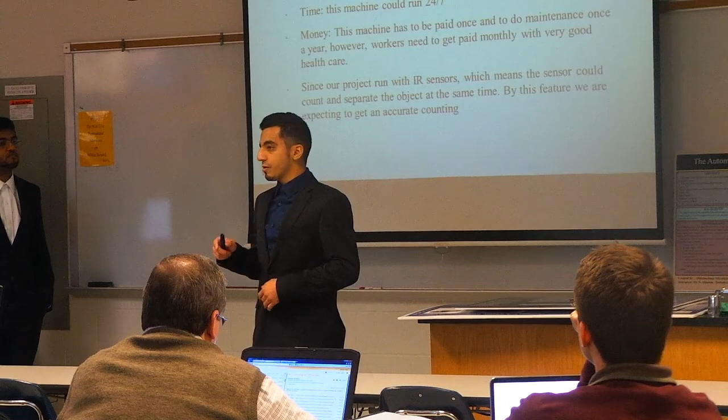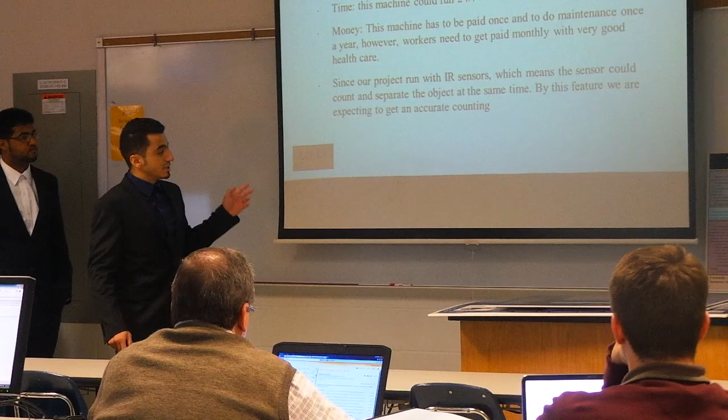So we came up with the idea to solve the major issues for most companies, which are time and money. When we're talking about time, this machine could run 24/7. And for money, this machine just needs to be paid for once and do maintenance once a year. Since our machine works with an IR sensor, the sensor can count and separate at the same time.

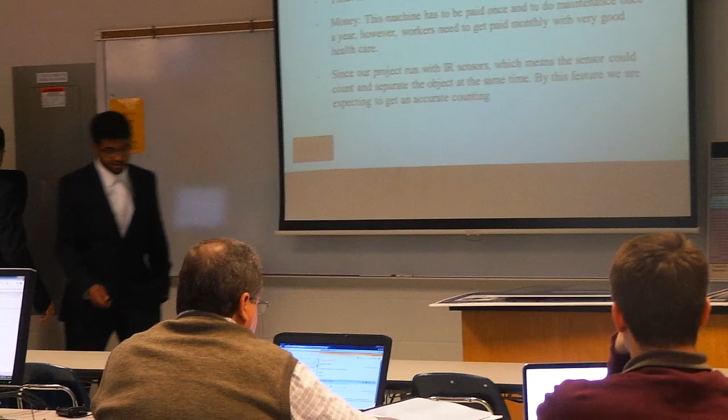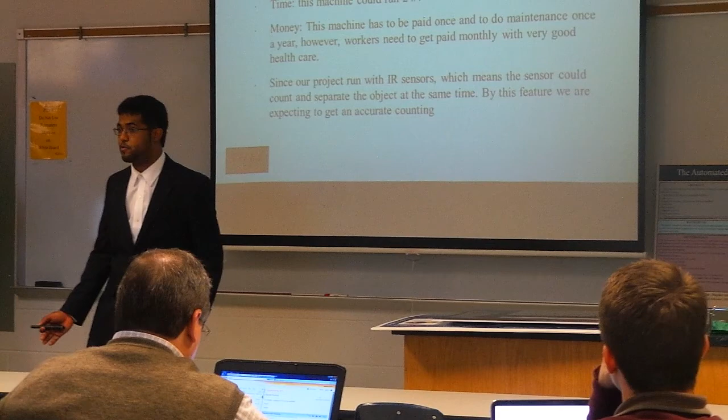Let's see what's behind the application. Since my major was hydraulic methods, I was wondering if I could move something naturally heavy using something other than hydraulic or pneumatic systems. I knew that a linear actuator can do that, but the problem was, how can I program it? I asked Abdul Nasser if he could program the actuator, and he said yes, he could do it through the Arduino. So then our project started.

Let's see the short clip.

Hello everyone, this is our project. This is the first actuator, and there is another actuator here. This is a sensor for big objects, and this is a sensor for small objects. If it's big, it will go this way. And if it's small, it will continue straight to the other box. Big again, for this box. Small, it will continue to the end. So let's go see the LCD. It's showing here that there are only 2 and 2 — 2 big, 2 small. Thank you.

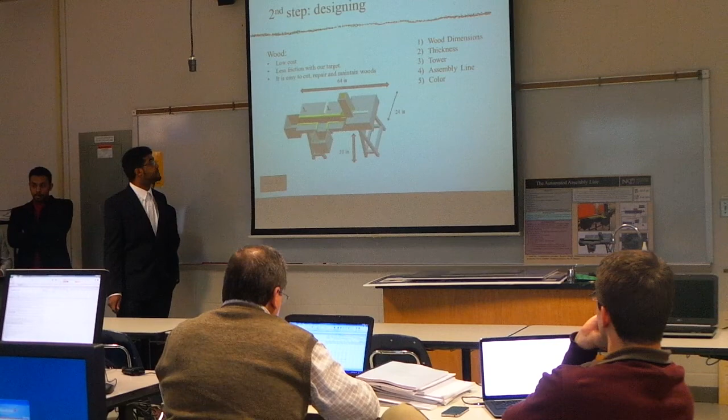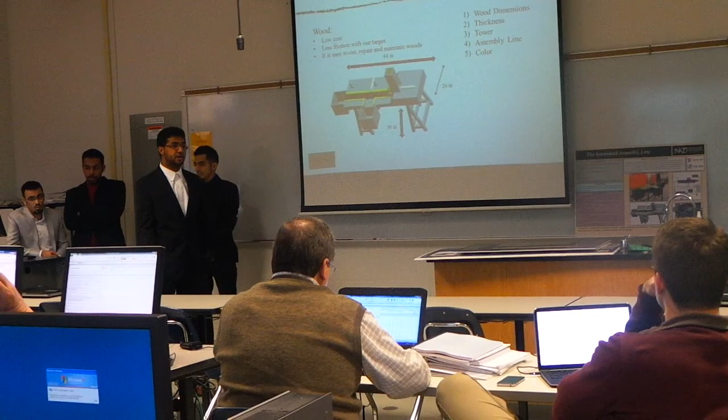Second step, design. Our design depends on these 5 steps. The first one is material and dimension. We use wood for our project because it's low cost and has the least friction with our target, and it's easy to cut, repair, and maintain. We have dimensions of 64 by 24 by 30 inches.

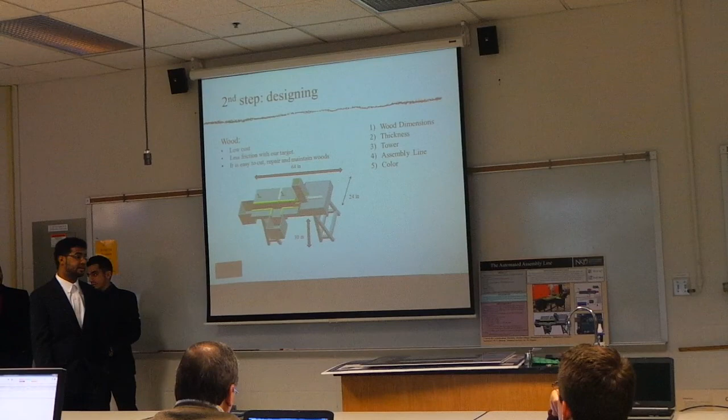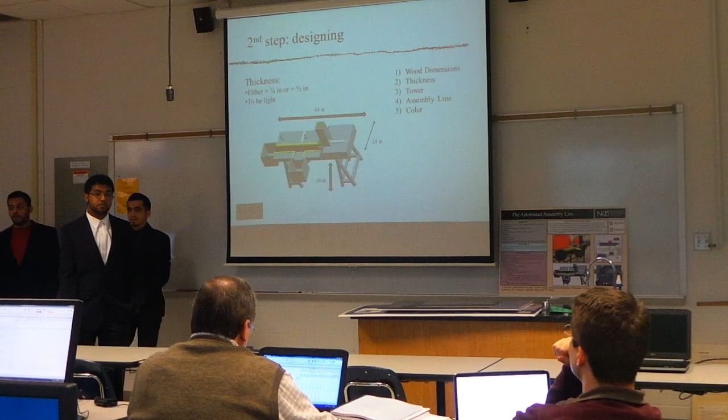The second one, thickness. Our project uses either three-quarter and half inch thickness because we want our object to be light.

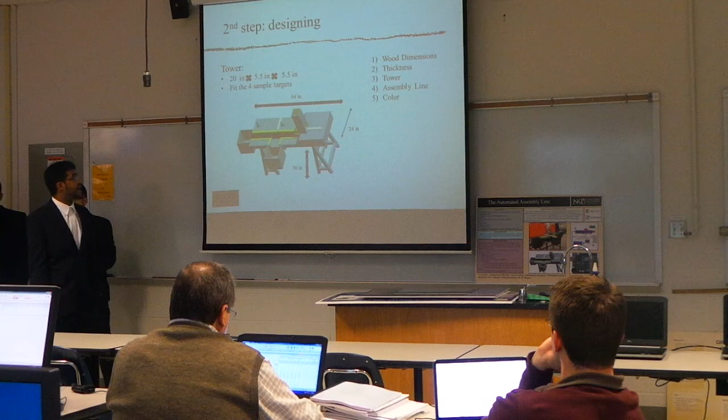The tower, we have 20 by 5.5 by 5.5 for the tower because we want the tower to fit the 4 samples for our target.

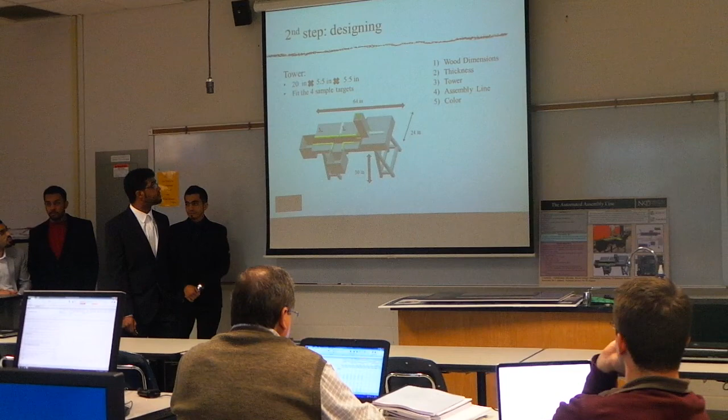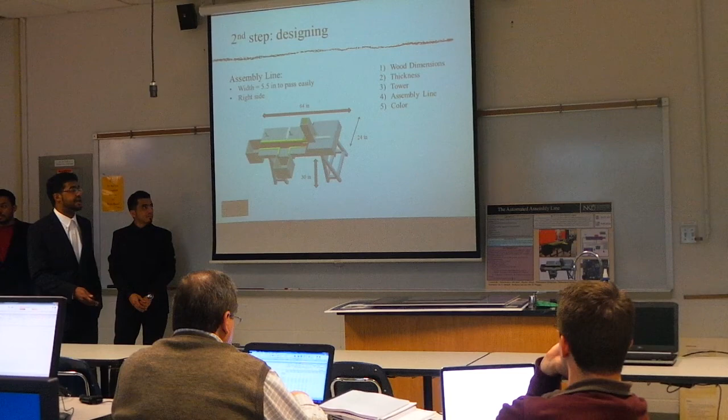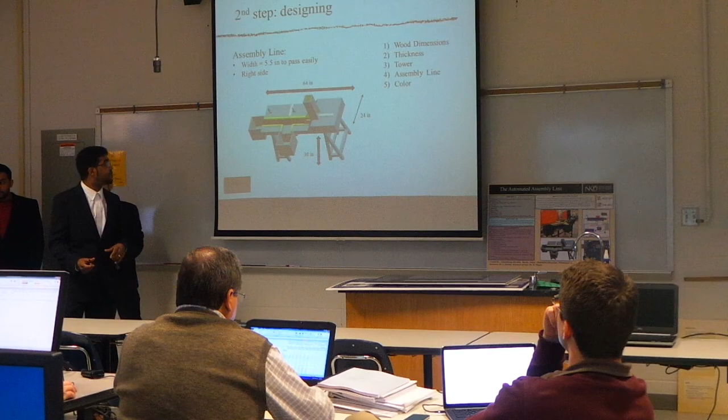The assembly line, as you see in this picture, is on the right side of our project because we want the object to fall down easier and faster. Since our object is 5 inches, we need the width of the assembly line to be more than 5, so we made it 5.5.

Finally, the color. We have black and yellow to match the NKU logo.

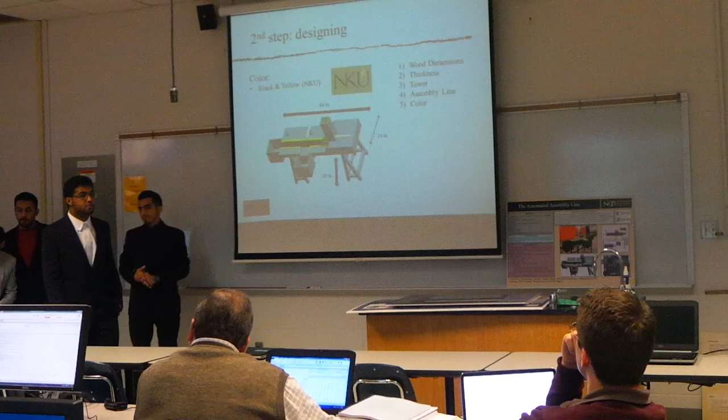Third step is the circuit. We need to list the components that we're going to use. As you can see here, we want something to push this side and this side.

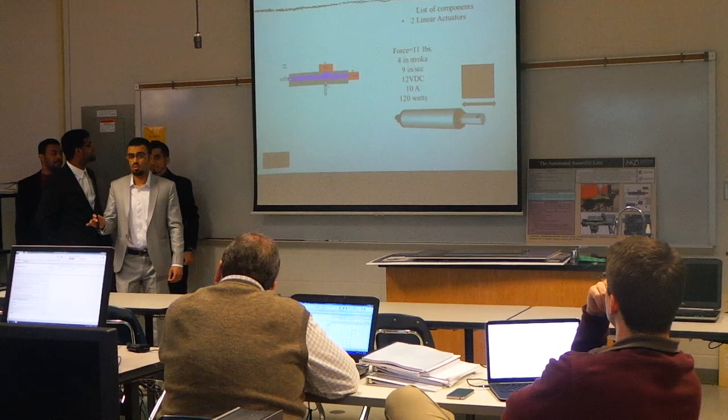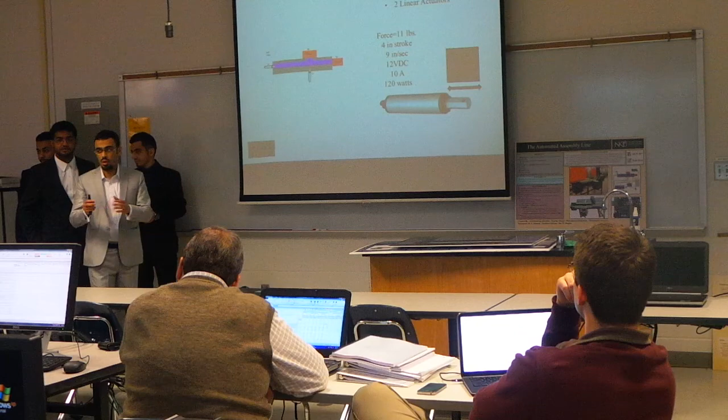So we'll use 2 linear actuators with a speed of 9 inches per second. This actuator works with 12 volts and 10 amps, and has a 4 inch stroke because our object is 5 inches and we wanted to move it to the center, so it's 2.5. But 4 inches is more than what we expected.

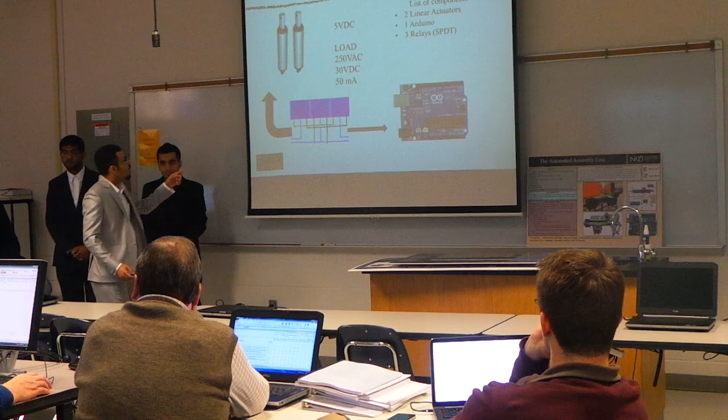There's another way, thanks to Dr. Alama who told me about it. We can use only 3 relays instead of 4 to save money for 2 actuators at the same time.

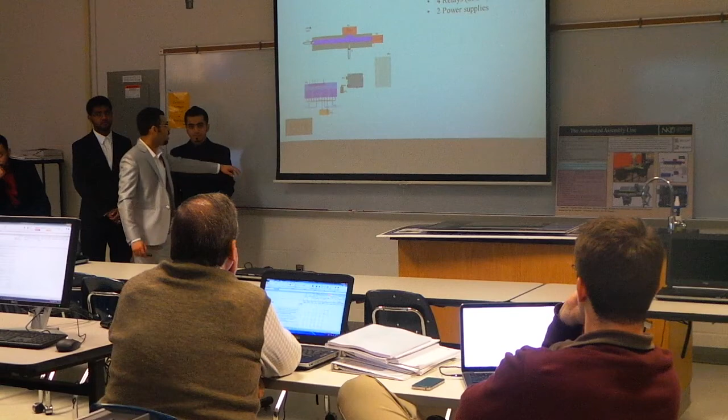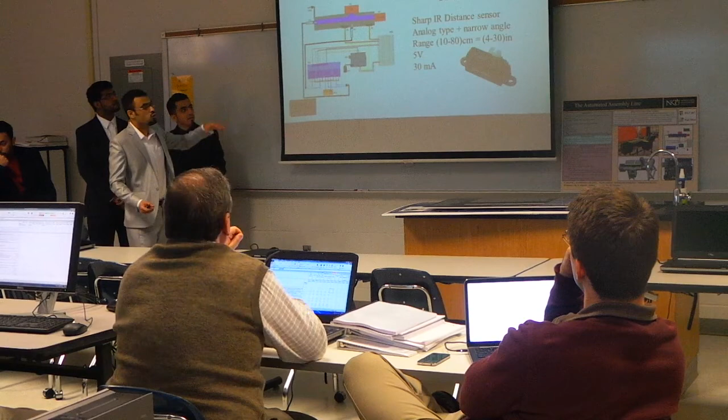Then we put them all together and we will use 2 power supplies. One is 12 volt, 10 amps for the actuators itself, and the other one is 12 volt, 1 amp for the Arduino. We wired everything up, then we brought the sensors to count and to detect big or small.

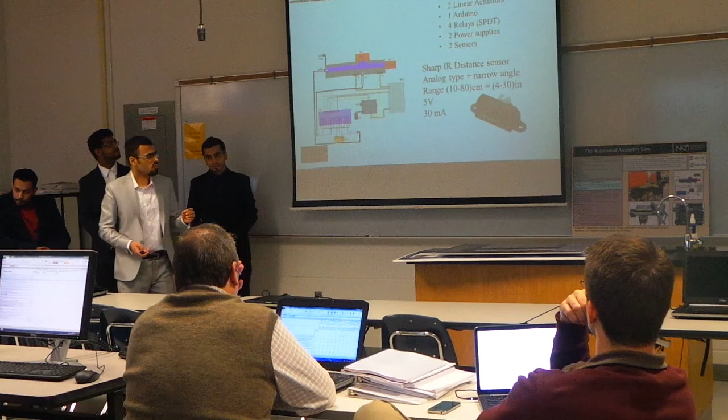The principle, I mean, you can see all of them sitting together that can cover up to 5 inches that we need here, because the actuator can move it 4 inches.

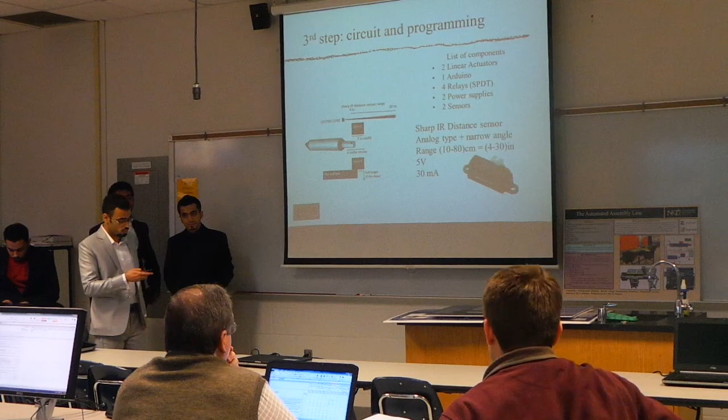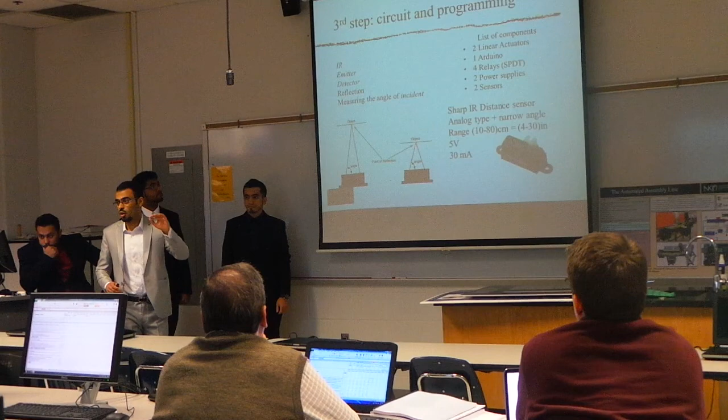The principle behind the IR sensor: on the right side is the detector and the emitter. So when it sends IR light into the air, if there is nothing there, it will keep going. But if there is something, it will reflect back. By measuring this angle of incidence, it will give you different voltage, and this different voltage means different distance.

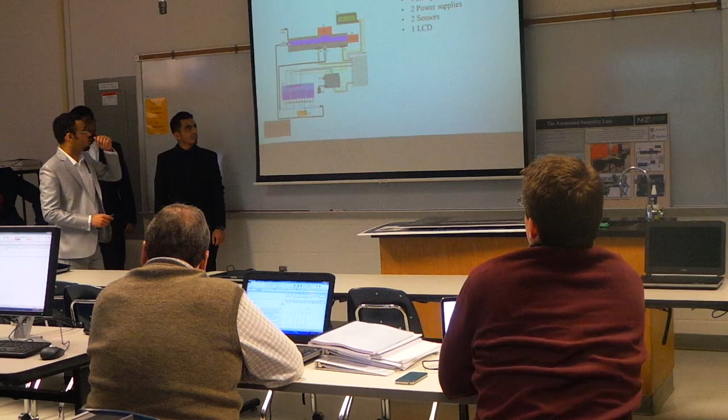The last thing is the LCD, to monitor everything on our project. We got an issue because all of these, the LCD, 2 sensors, and the relays, all of them on one Arduino, the power supply is not enough.

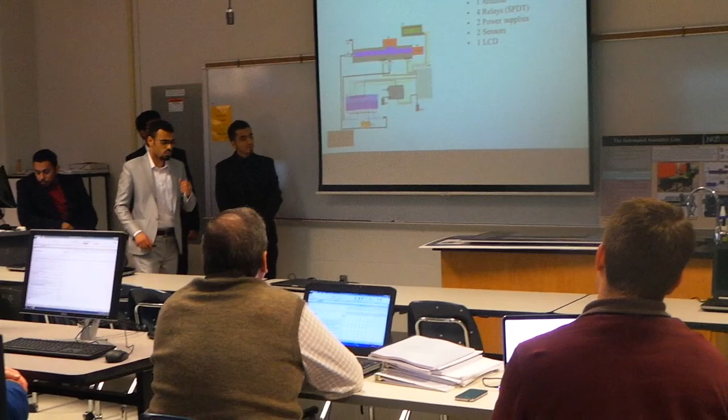So we used a backup battery, as you can see here, with 5 volts 1 amp.

The overall cost for this project is 1,800. And as Yahya told you, you only need to pay once, so you don't have to pay workers' salaries each month.

Regarding maintenance, suppose one of these breaks, the most expensive thing is the treadmill itself, and you can replace it. It's half of our project cost.

So the hypothesis behind this whole project is to use IR sensors communicating with the linear actuators themselves. After all the research and hard work, thanks to all the doctors who gave us this opportunity to bring this project to life.

So in conclusion, these are the recommendations we suggest to all users: the speed of the treadmill itself needs to match the speed of the linear actuators, 9 inches per second. More than that will not fit.

IR sensors are good for indoor use, but for outdoor use we recommend ultrasonic sensors. Pneumatic and hydraulic actuators are good, but for heavier objects.